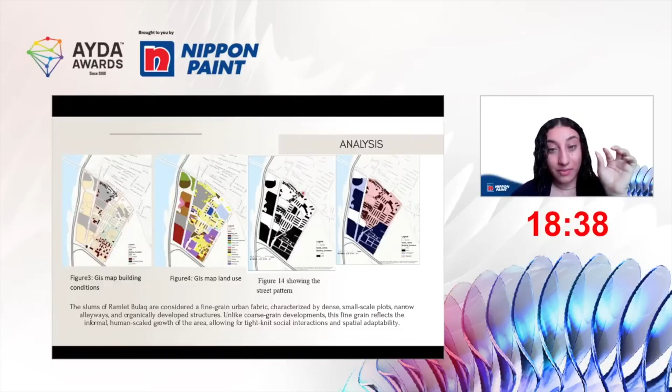It's very coarse grain, very bulky, and as you can see, this part is the newest part - it's very thin. This is very coarse, this is very fine grain, the very small and dense scale plots. This is my plot for today and what I'm discussing.

As you can see, this is the most recent photo I've taken of this place. Notice the contrast between the towers behind the small houses - they call it slums in Egypt, but I don't like to call it this way.

These incremental settlements are very narrow. Reflecting the Nile City towers, it's very small and has a great contrast with the towers themselves.

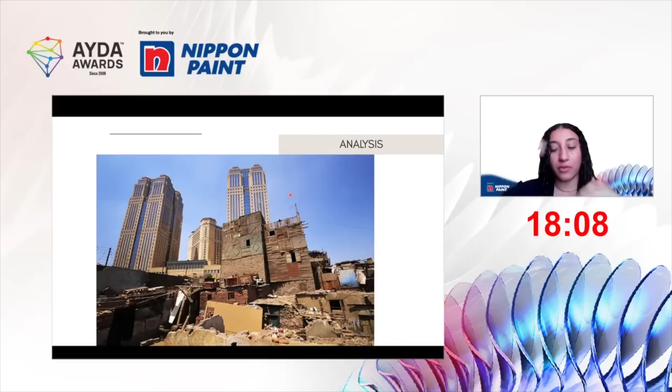So why are those photos taken pixelated? Because, as I said, this place is very unsafe.

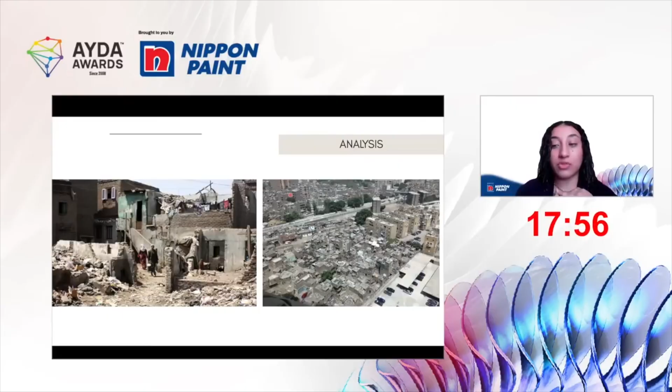You cannot enter. When I tried to engage with them and take photos of the site, they were so afraid to let me in, as if I'm a stranger, so they didn't want me to go in.

They call this housing technique al-eshash. This eshsha in Egypt is like a nest for birds - birds make nests for their children. They also have this technique; they call it a nest.

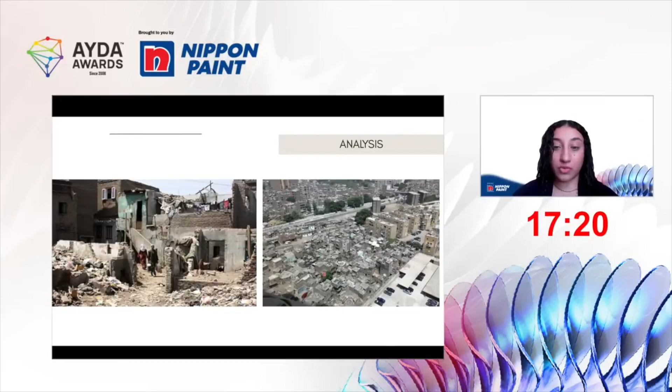So you can see how the mother and father are building for their children in this land to live. I want you to concentrate on this photo because it defines the grain I'm talking about so much - we will use it more after.

Also, this is the life there. This is the contrast between people - we're raising high towers and forgetting that there are people living poorly there.

As you can see, these are the new streets built to make people happy, but they're definitely not happy right now because they were built without regard to their actual activities.

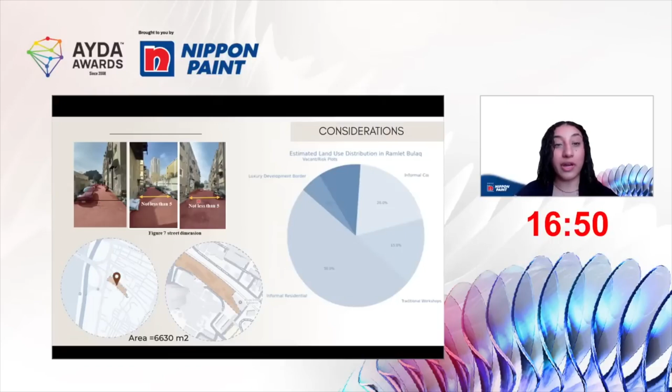So I searched for the activities men should do - and why do I say men? Because women there are treated like second-hand human beings. They're not the first degree, not the dominant one in the family - mothers are in second place.

So they're not paid attention to, and the father is the provider. Men had so many activities before.

the 2011 revolution. As you can see, they had to go to work in the factories, they had craftsmanship, they had workshops. Then they went to 5 prayers each day and used the mosque.

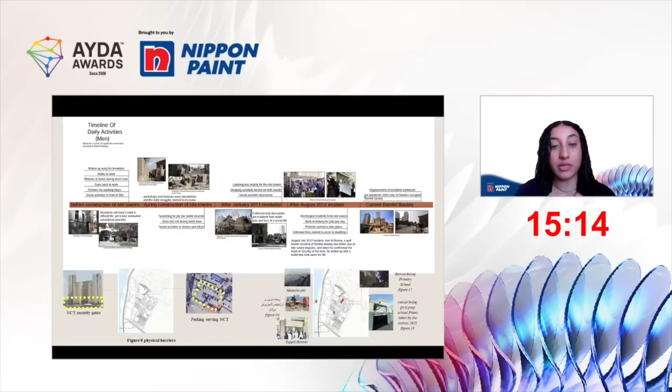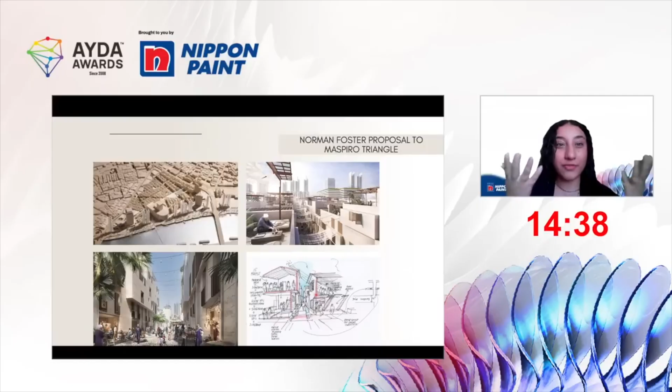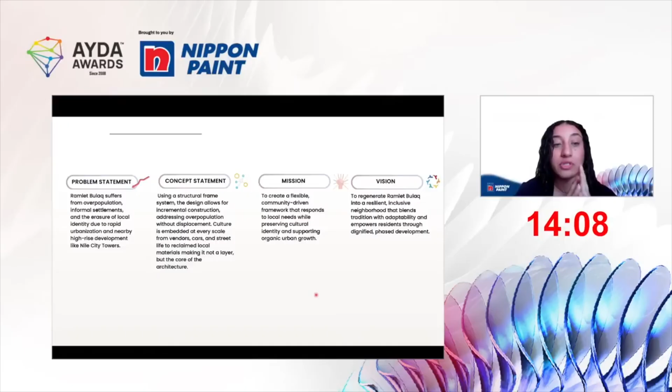So we can conclude a problem statement from all of this: that Ramlet Bulaq, this part, is having overpopulation and informal settlements. Also, it lost its identity for people to have craftsmanship because they went to the towers to work as security guards and left their craftsmanship. So also it has the contrast between the high-rise buildings and this small-scale housing.

And what I started to think of - what if I didn't start it the architecture way, but started the engineering way? This engineering way took a place to put the guidelines for people to build for themselves. So I'm having people that build, embracing more their building techniques. I wouldn't be building for them - they would build themselves. I'm just the architect, I'm the maestro who's gonna put the guidelines for people.

So I started with putting those frames, that structure that will manipulate the building techniques they are doing. So they are living in their places, but with my guidelines.

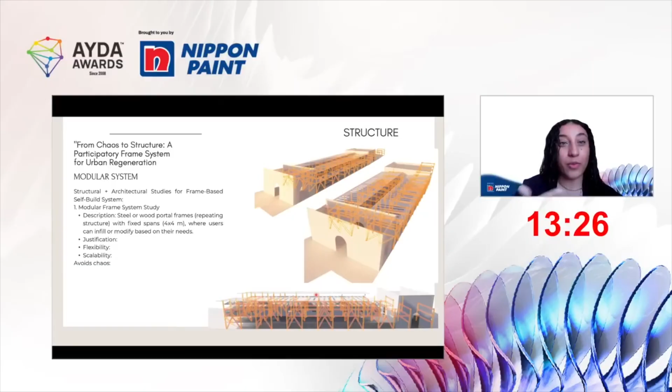So here is the smartness and how to build. As you can see, I need him to know when he will find this V or this X in the column - this is the end of the plot, so he should end it. So when he comes to this part, he knows that this is the other end. And I will give him some small techniques to build with, so the frame will appear by this shape. So he will see that when I have an X, it's the vertical we can go. So the structure is very...

As you can see, I started with making the main spine to make the maneuvering easy. I started to put the mobile learning hubs and the green landscape zones, culture and entertainment zone, to give them the quality of life they need - as if I put together all the things that I need them to learn. Also, the classrooms fit very well with the workshops, so they can interact with the people that have the craftsmanship and learn more.

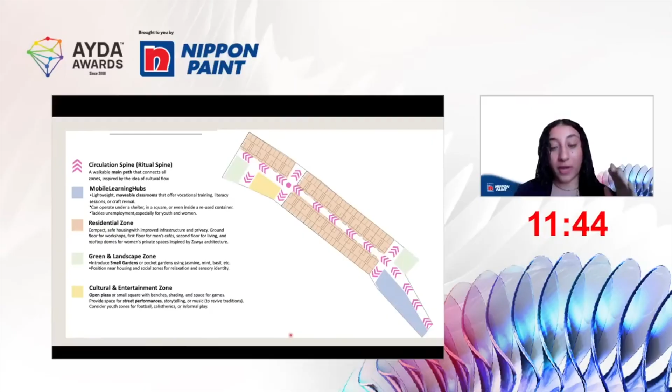As you can see, also I have the great bulk of the zoning for the residential zones, and the main focus of the problem I have. Also you can see that this ground master plan will have the workshops in each plot for each family, the workshops to revive more their craftsmanship. Also it will have the landscape part, the theoretical classrooms to learn more, the seating areas, and the mosque part and the entertainment zone.

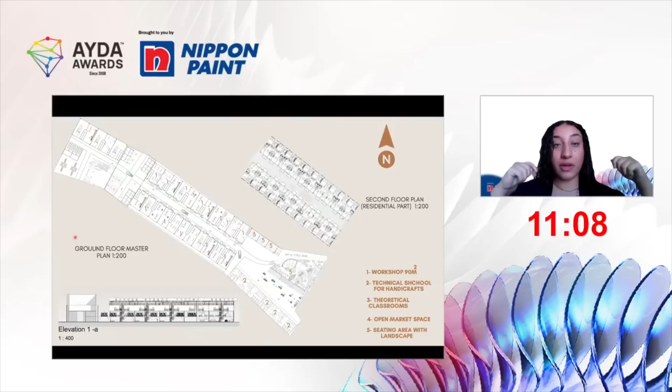So as if I made this plan - they are building randomly, so I made them build their way, but I made it just more clear. As if my input as an architect is just to put the guidelines, but to embrace more their talents.

This workshop's base, as in the past, men used to have the workshops under their residential parts. So I made this workshop, and when he finished his work, he goes to the man zone, the kahwa, to revive more his culture and social intelligence.

Also, we go to the private part that's residential for the families, and we go to the most private part for women, to embrace women more and make them have an activity timeline like men. So this part is about the self-sufficient mezzanine, to make women do two main activities in their day.

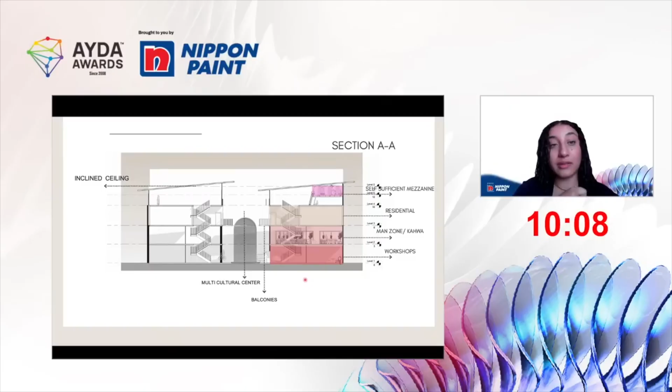The laundry, a big part of Egyptian culture. Women also do laundry with each other, and it's like a social interaction for them. Also, the self-sufficient mezzanine is to plant greenery for the daily food they need.

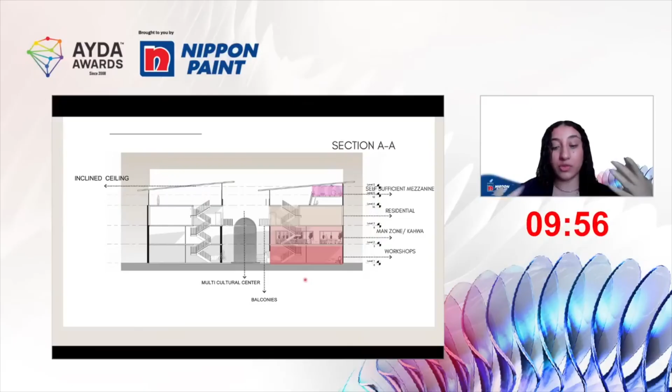About the materials we will build with, I didn't have to dig deep because the materials are very clear from the site. They have the techniques, so people there build on concrete bricks, and when I got there, I saw he dips the wood in a liquid material that helps the wood become stiffer, so it won't bend anymore.

So he makes the stairs with it, and he can open windows, as you can see here, from the wood panels. He can also make his doors with it.

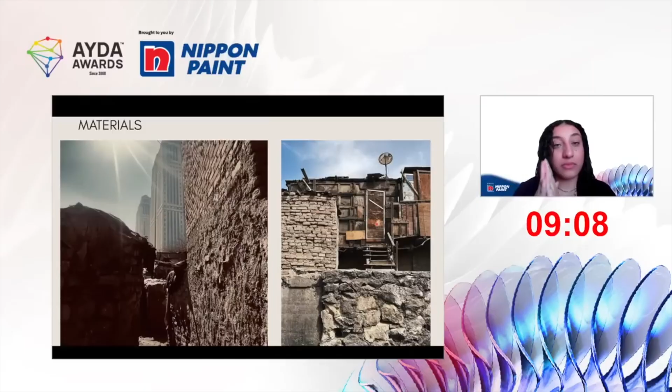So I will just help him with the abandoned materials in the factories that are abandoned in this place. We have all the confirmation from the government in Egypt to do this, because these materials are already dead.

Also, as in my study diagrams for this project, I made the window very narrow, just to give privacy and just enough sunlight. They don't need more openings than this—it's very sufficient for their privacy.

Also, you will see I made these stripes in the ceiling, this inclined ceiling, to help block sun radiation, and these stripes give sun to the self-sufficient mezzanine for the greenery part.

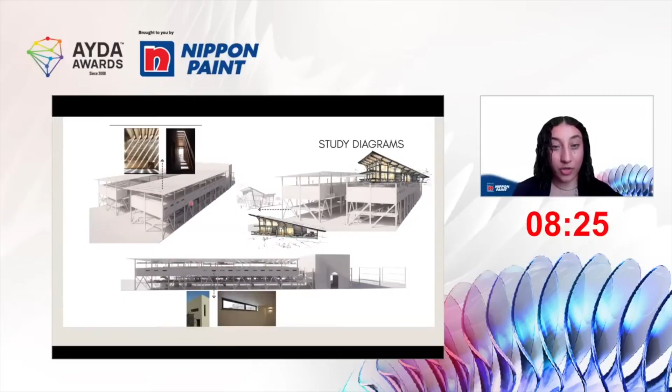As you can see, the structure is transparent and clear—no more hiding and no more drug dealing in these crime scenes.

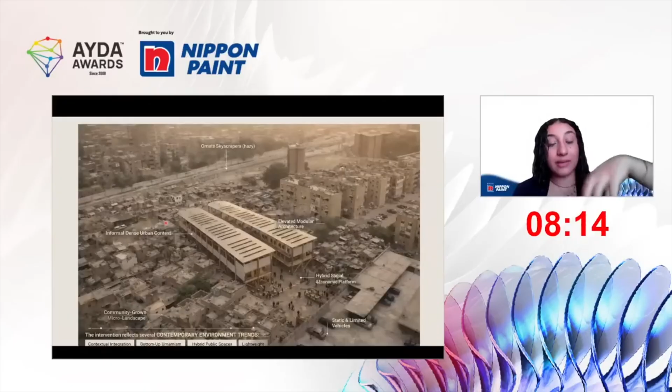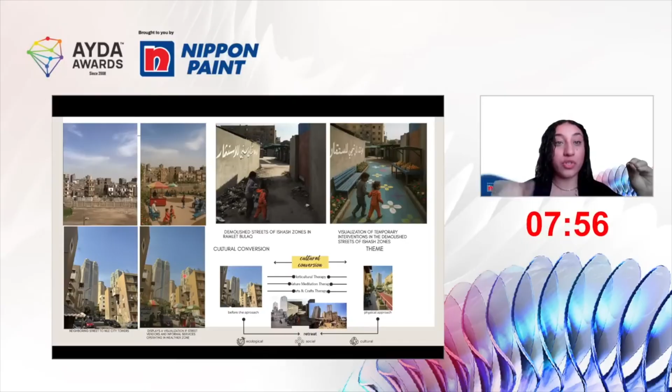So you will see how I put this plot standing out beside the old plots. When we go to a cultural conversion layer, we don't have to put a layer that just says 'this is culture.' We should design each and every step we're doing with culture, so we revive each and every step with this.

In the rendered shots, you will see how people interact the same way they do, but they use the terraces in a smarter way now, and the contrast in a smarter way. You will see the selling part they do, as if they are doing it traditionally. So we're just embracing the culture—it's more embraced, but not changed a lot.

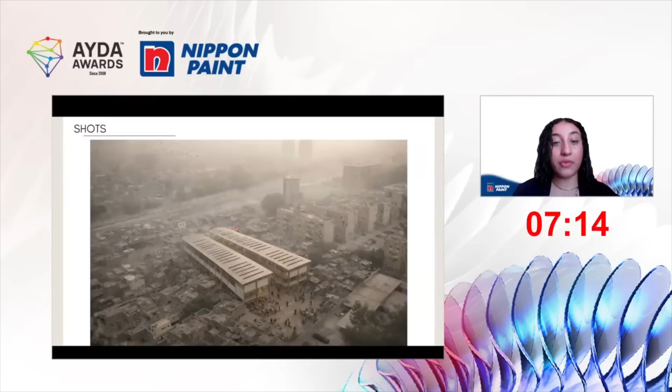So I'm changing from this randomization to these guidelines. Also, this is the thin pattern I talked about, and how this thin pattern could be changed into this smarter one.

Also, that's a serial vision for me to revive more how people should interact again and how they should revive their activities again. This also is the part of the mosque and the safety part, the ambulance they need there.

So that's for my project. One thing I needed to do is, when I die, let them remember me as the one who built from people and to people. Thank you so much.